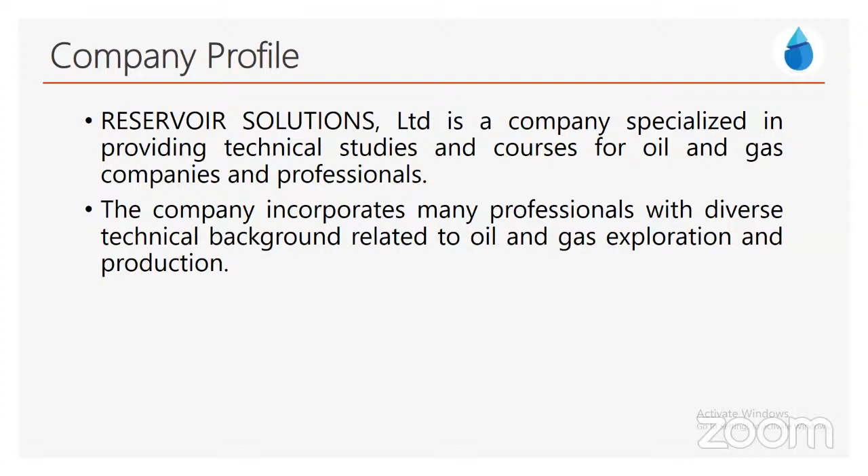Reservoir Solutions is a company specialized in providing technical studies and courses for oil and gas companies and professionals. The company incorporates many professionals with diverse technical backgrounds related to oil and gas exploration and production. Our services include technical reservoir studies, field development planning, reservoir static and dynamic modeling, economic feasibility studies, and technical support for academic research like PhD and master's degrees.

If you are a PhD or master's student and need support from us, we can provide you with the technical support that you will need. Also, we assist in writing technical papers and publishing them. We also have technical petroleum courses provided by industry experts, and we provide mentorship programs.

For mentorship programs, if you need to focus on some topic, like a private course related to reservoir modeling, nodal analysis, production engineering, hydraulic fracturing, or any topic related to oil and gas, we can provide you with a private course with an instructor with high experience related to this topic.

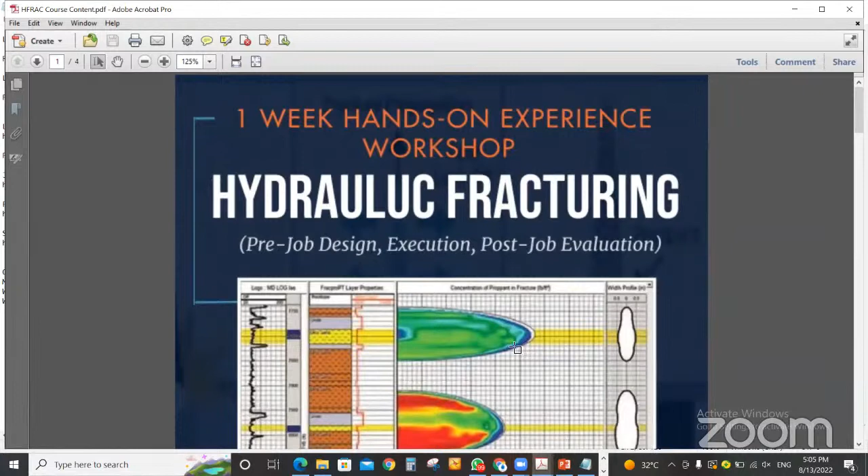Before introducing Engineer Muhammad, I wanted to give you an introduction to our upcoming courses. We have 2 upcoming courses. First, hydraulic fracturing: pre-job design, execution, and post-job evaluation. That course will start on the 25th of August, so we have about 12 days, then we will start, inshallah.

In all our courses, we provide lifetime access to recorded sessions, so if you have any difference in time zones, don't worry about that. You will have lifetime access to the recorded sessions. Also, application datasets - you will have datasets to apply using the software. Our workshop is 100% practical, application-based. We also provide course material like lectures, PDFs, Excel sheets, and so on. You will also have open discussion with the instructor during and after the course.

If you have any question related to the course after the course period, you can ask the instructor. At the end of the course, you will have a certificate with online identification. All of that package will be granted for all of our courses.

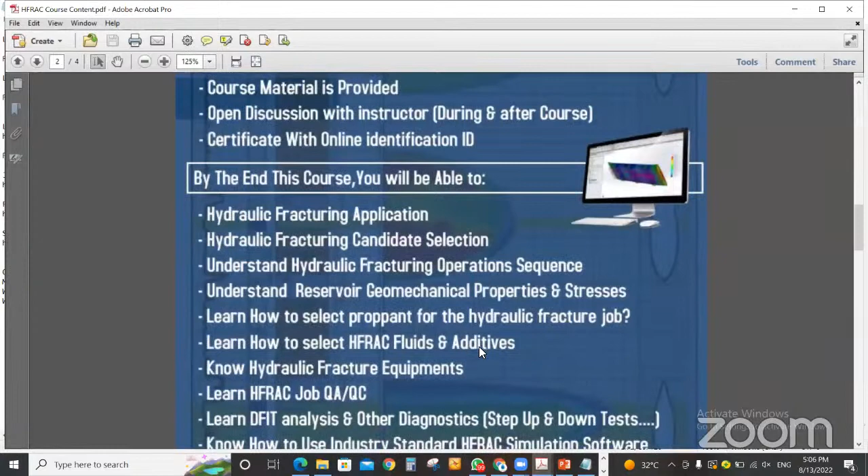For the hydraulic fracturing course, by the end you will be able to know the application for hydraulic fracturing, select the candidate for hydraulic fracturing, understand the hydraulic fracturing operation sequence, the equipment needed, and how to select the fluids, proppants, and equipment. Also, how to make a geomechanical model related to your reservoir.

Also, you can design the diagnostic plots needed for hydraulic fracturing, like the mini frac design or mini frac analysis, and all the other pumping diagnosis plots. Also, you can make QA/QC for the hydraulic fracturing job and all the other diagnostics for the evaluation of the hydraulic fracturing. All of that will be done on software to practical industry standards.

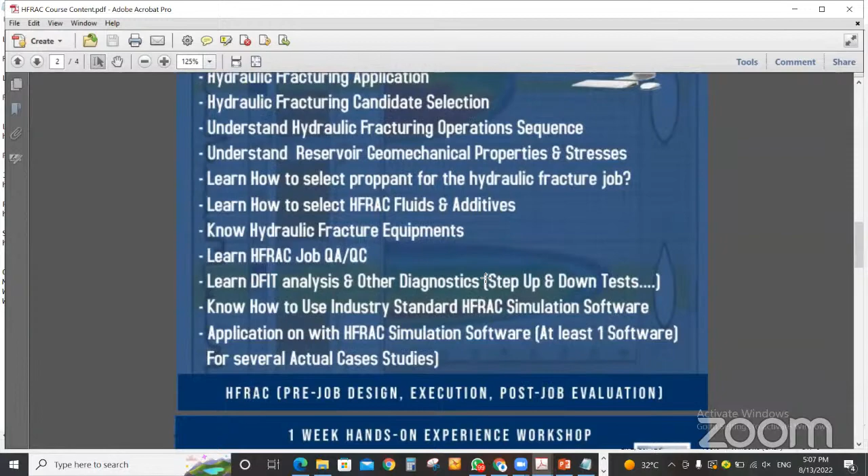The price of this course will be about $35 for students, so it will be a very good opportunity for students and also for professionals - the professional price is only $50. If you want to register for that course, I will send a link for registration into the Zoom chat. That was for the first course starting on the 25th of August.

The second interesting course we will start, inshallah, in September, on the 10th of September, is a 2 week hands-on experience workshop related to borehole image, FMI or OBMI, borehole image processing and interpretation. If you want to make interpretation and processing for the FMI log or OBMI log, you will have that chance after attending that course.

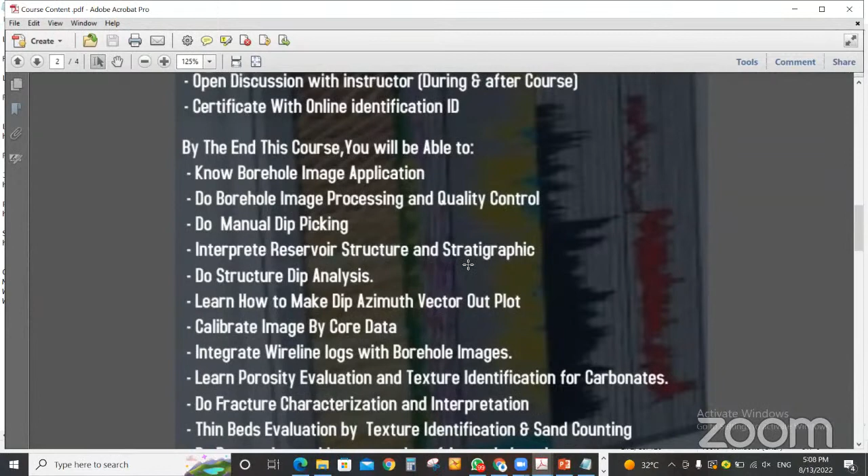The same package applies for this course: lifetime access, datasets, practical workshop, course material, and certificate with the instructor. By the end of that course, you will be able to know the application for the FMI, do processing and quality control, do manual dip picking, and interpret reservoir structure and stratigraphy needed for structure modeling of the reservoir.

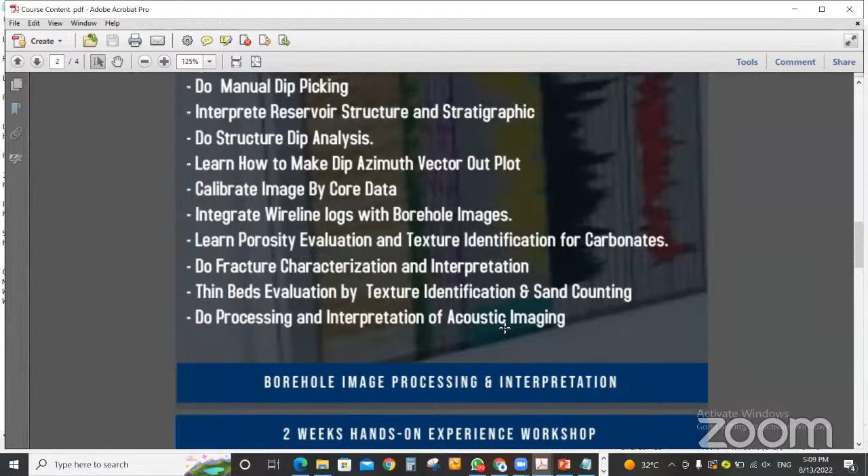Also, porosity evaluation, texture identification for carbonate reservoirs, fracture characterization and interpretation, thin bed evaluation by texture identification and sand counting, and processing and interpretation for acoustic imaging. We will also have acoustic imaging in our course. So all of that you will enjoy for the price of that course.

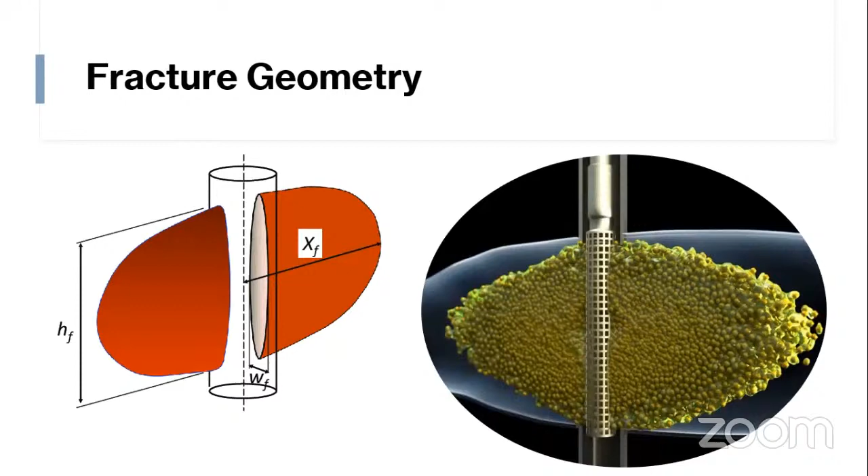The XF, the hydraulic fracture half-length, and fracture conductivity, is what is created in the formation, and is the main contribution of frac during the post-frac production.

To understand fracture propagation simply, we can make an analog for simplification. Let's imagine you blow a balloon with your mouth, and that's typically what happens during fracture propagation. We pump fluid - like in this case air, but in hydraulic fracturing it's fluid. So you pump with pressure, and this rate increases the volume of the balloon to make the fracture.

So the fracture geometry, which is the volume of the balloon, is a difference between the inner pressure and the outer pressure of the balloon, and this is the analog to the fracture geometry. Also, during treatment, we need to keep the net pressure high enough to create a suitable geometry and keep the width of the frac open for proppant placement.

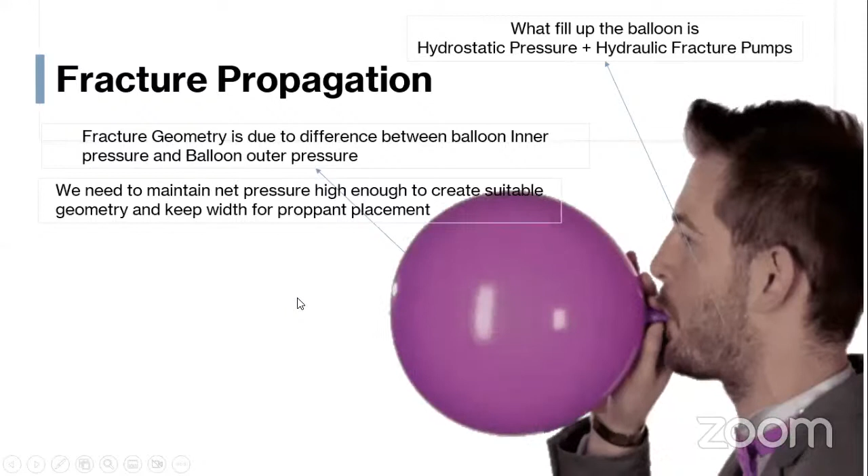Also, you will get some resistance if the distance is larger, due to friction, and this friction will decrease your net pressure. At the end, the shape of the fracture geometry depends on the net pressure - the amount of pressure you pump into the balloon, or pump into the formation - more than the closure pressure, or the minimum horizontal stress in the formation that you act against during placement. Also it depends on the formation properties, the leak-off rate, and many factors.

Also, an important point is what happens in this balloon analogy to the balloon material. You can imagine and figure out that the balloon material is under tension. Hydraulic fracturing is the same. During the treatment, during pumping of hydraulic fracturing, what happens to the well bore diameter is tension.

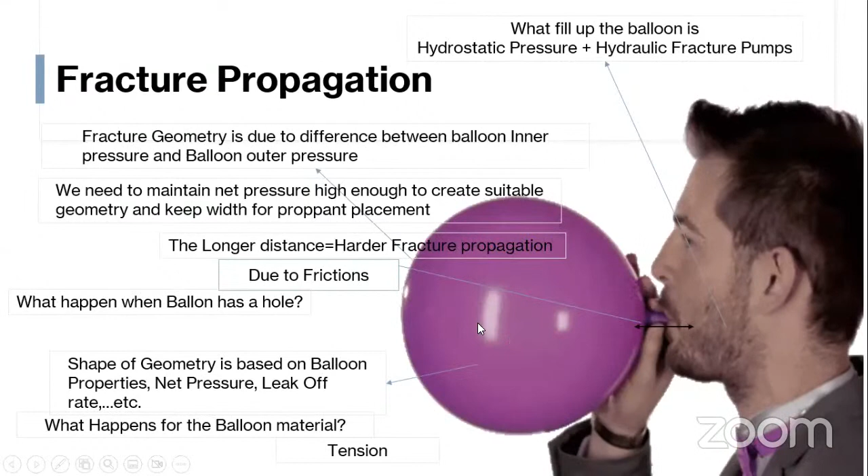Also, if the balloon has a hole, it will be harder to fill the balloon. It's the same during the treatment of hydraulic fracturing. If you pump hydraulic fracturing and there is a leak or loss in net pressure, it will be hard to create the required hydraulic fracture geometry.

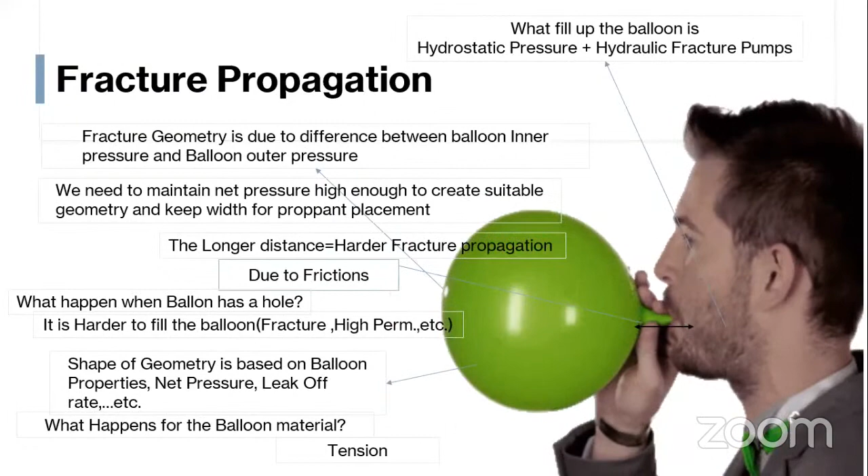So the main concept we need to understand to evaluate hydraulic fracturing during the treatment is net pressure. What is net pressure? Simply, it is the amount of pressure that increases more than the minimum horizontal stress in order to create the hydraulic fracture.

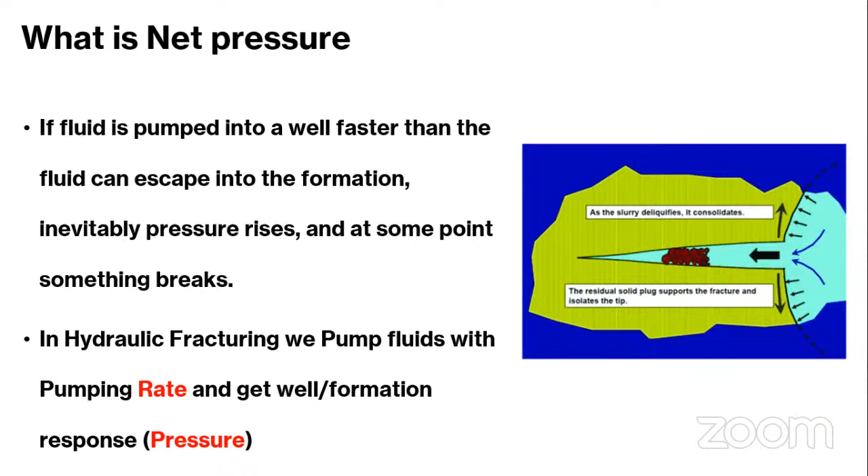To understand that, we need to imagine the concept of hydraulic fracturing is to pump with rate. We don't pump pressure, we don't put pressure, we pump rate, like pumping in a pipe. Then, due to the resistance of the formation, due to its low permeability, or because it can't handle this high rate, the pressure increases, and when this pressure increases more than the fracture pressure, it breaks. So the fracture is created due to the rate, not the pressure. Because we apply the rate and the resistance increases, the pressure increases more than fracture pressure, and it creates a hydraulic fracture.

So net pressure is simply the pressure inside the fracture if we remove the effect of what makes the formation close this fracture. Because we open this fracture, and the formation tends to close it to reach equilibrium. The difference between the pressure inside the frac and the closure pressure, or the minimum principal stress that tends to close the frac, is called net pressure.

To calculate this net pressure, simply we pump the fluid and measure the wellhead pressure. If we add the hydrostatic head on the wellhead pressure, and remove the effect of frictions, all frictions down to the formation, including perforation friction, pipe friction, near wellbore friction, or entry friction, we can get the pressure inside the hydraulic fracture. So the pressure inside the hydraulic fracture equals wellhead pressure plus hydrostatic pressure minus all frictions that we needed to overcome to open the hydraulic fracture.

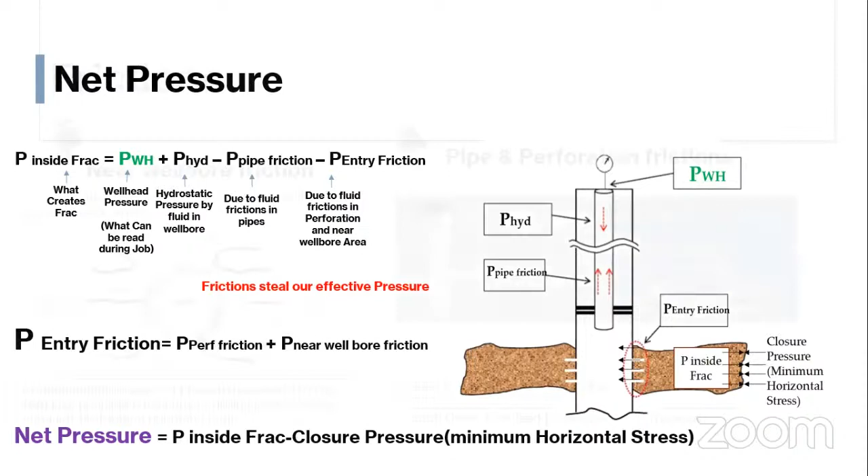The main loss in net pressure, the main cause that decreases net pressure, is friction. So if the friction increases, that takes away from my net pressure, and the fracture will close.

To understand net pressure well, you need to understand that we have two types of friction. Pipe friction is due to friction in the pipe, and perforation friction is due to having multiple perforations, which causes fluid friction. So the pressure that we open the frac with decreases by this amount, so we need to apply pressure higher than this value.

And near wellbore friction is due to the fracturing fluid orienting to be perpendicular to the minimum horizontal stress to allow fracture propagation. This orientation and alignment of the fluid path causes friction, called near wellbore friction.

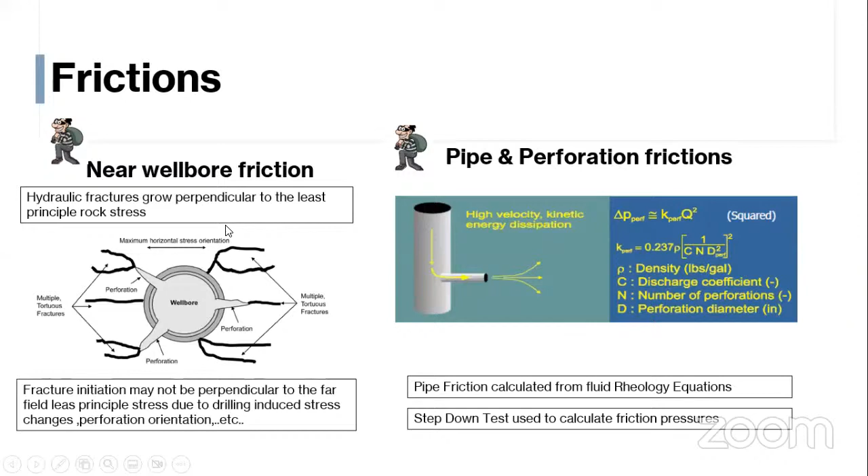Also, for hydraulic fracturing to create a fracture geometry, we need to understand that net pressure's relation with the stress difference is the main control of fracture height. So if I pump with net pressure of 1000 psi, for example, how will the fracture propagate in height? There's an old rule of thumb based on experimental study: any net pressure can break the stress difference between two formations if it reaches 50% of the stress difference, and once it reaches 70% of this stress difference, it will propagate and break the barrier.

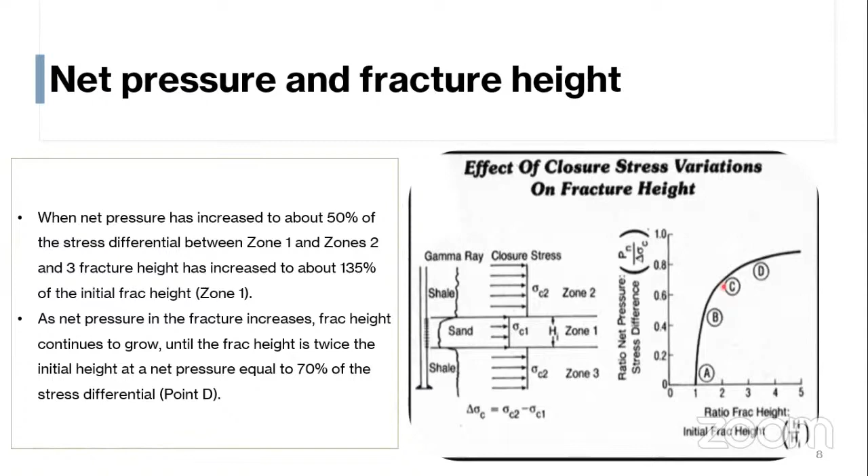It's very important to understand that we create net pressure, and this net pressure will struggle and compete with the stress difference. If this stress difference between two formations is very low, it can't control this net pressure, and this net pressure will cause the fracture geometry to propagate in the formation. So if I pump in this sandstone and the net pressure is more than 50% of the stress difference between the shale and sand, it will cause fracture propagation into the shale, until the net pressure is consumed by the fracture geometry.

So why do we need to understand net pressure? Simply because net pressure is related to fracture geometry, fracture height, fracture width - all the fracture geometry is created by net pressure. So we need to understand net pressure analysis to understand the real fracture geometry during design, during on-site analysis, or post-frac analysis.

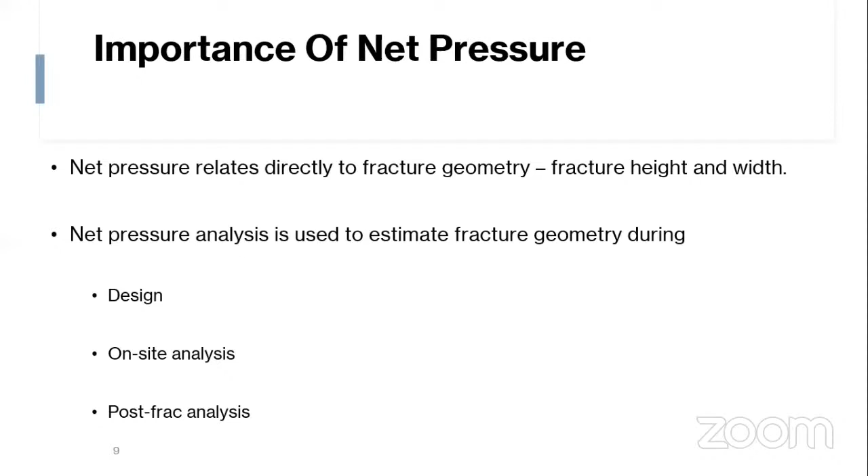Net pressure, as we said, is the main concept of fracture geometry and fracture propagation. If there is any net pressure created in the formation, there is a fracture with fracture width, and the width is related linearly with the net pressure.

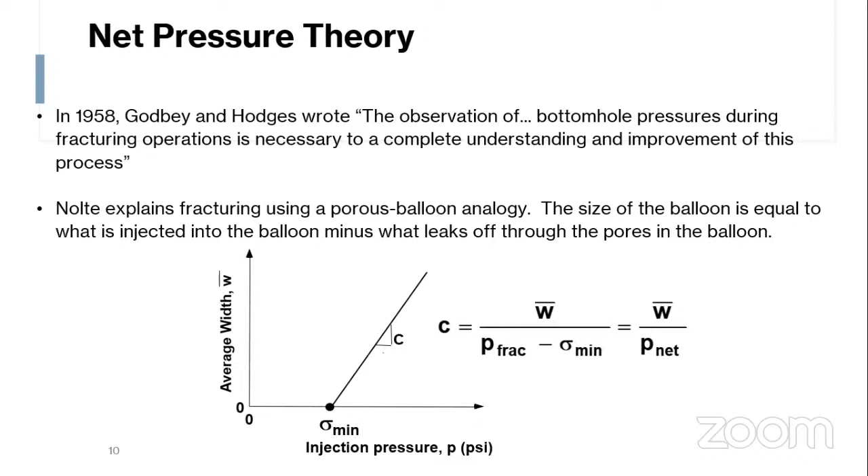So if I had a hydraulic fracture job, there is pressure going up and down during the treatment, and I have a plot of this. To understand what happened during the treatment, we need to convert this pressure to net pressure.

How to convert this wellhead pressure to net pressure? Simply by the equation: take the wellhead pressure, add hydrostatic pressure, and remove the effect of frictions - near wellbore friction, perforation frictions. All these effects are removed from the pressure, and after adding hydrostatic pressure, you remove the closure pressure to understand how the net pressure is created during the pumping.

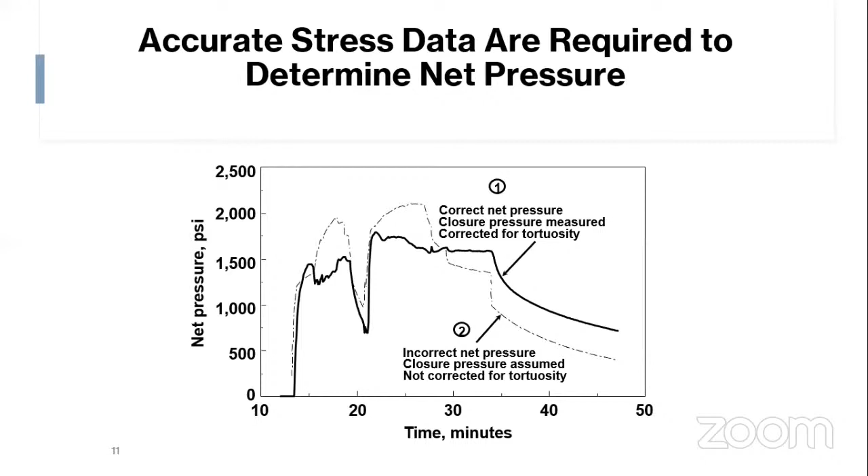And from the net pressure over time, you can understand how the fracture propagates.

Also, to understand fracture propagation, the fracture initiation starts from the weakest point, the minimum horizontal stress. There is minimum horizontal stress in the formation due to differences in formation properties. The main point is that fracture initiation happens at the point where the minimum horizontal stress is lowest, then it starts to propagate.

It starts to propagate and increase in height. So the net pressure at this time starts to decrease because we haven't covered the whole pay zone yet.

Then when we reach the barrier, the shale above, or the stress difference that can control this net pressure, fracture propagation starts to propagate in length, so we get an increase in net pressure. Now the stress difference controls the net pressure, so net pressure tries to create the fracture geometry in length.

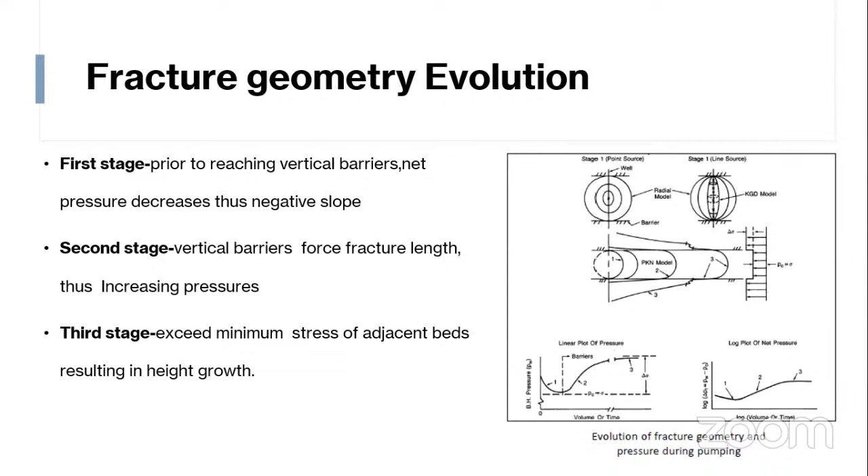Once the net pressure increases more than the stress difference between the pay zone and the barrier, the net pressure invades the barrier and creates a fracture in the barrier as well, which can be seen as height growth.

So there's a technique called Nolte-Smith technique - simply a magnification of the effect of net pressure over time. Nolte-Smith sets a technique with some assumptions, and it only works with net pressure.

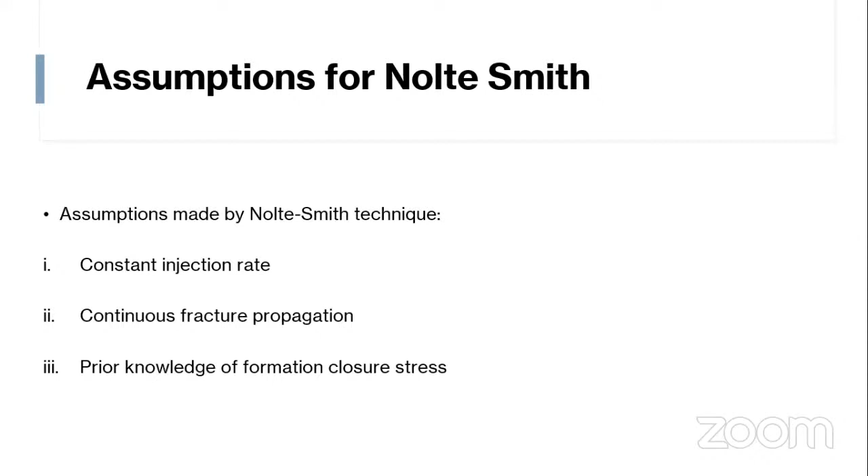It assumes constant injection rate and continuous fracture propagation - so the fracture propagates and doesn't stop during the treatment - and it needs the formation closure stress. Formation closure stress is a stress that tends to close the fracture against the fracture propagation.

Nolte-Smith is a real-time analysis. During the pumping, you can understand how the fracture propagates.

The Nolte-Smith technique lets you detect fracture events, like if you have a screen-out or proppant bridging in the formation, where the proppant doesn't go deep enough, or if you have height propagation where your net pressure decreases and your fracture geometry isn't efficient - created in height rather than in length as you designed. So it detects how the fracture geometry is created during the treatment.

But the main disadvantage of the Nolte-Smith technique is that it needs the formation closure stress, and since it's hard to understand the fracture geometry, it requires more experienced people to understand what's happening in the formation.

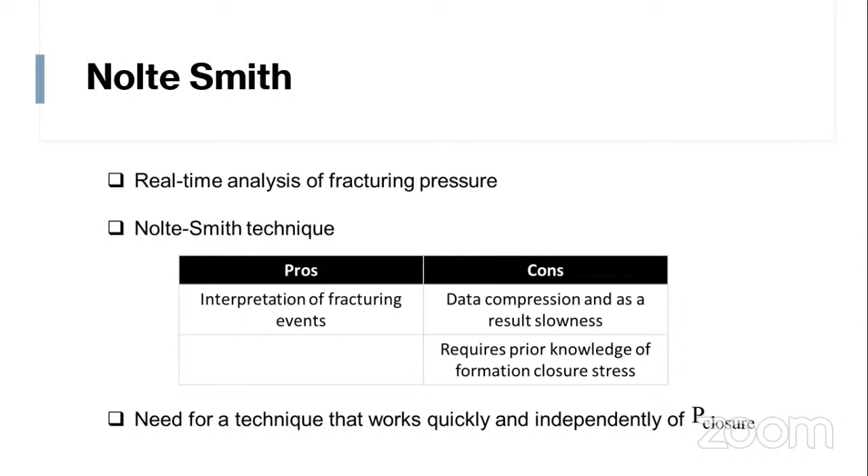The Nolte-Smith technique is simply a relationship log between net pressure and injection time, assuming injection rate is constant, we know the fracture closure pressure, and we assume the fracture propagation is continuous during the treatment.

First, at the start of pumping, at the start of creating fracture propagation, you can find the slope of log net pressure with time to be between 1/8 to 1/4. This slope means we create a fracture, but we still haven't reached the stress difference between the pay zone and the barrier.

Once it starts to stabilize, we now start to get propagation in height at normal fracture propagation. The slope is 0, and we need to keep monitoring this slope during the treatment in the frac van.

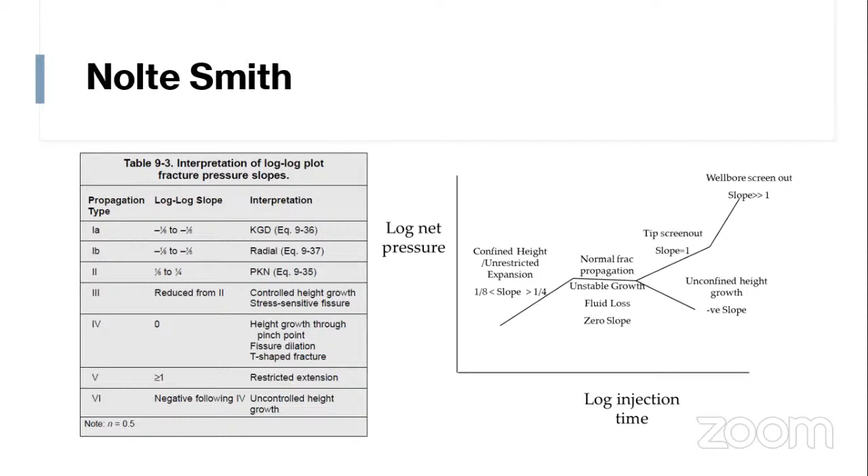During treatment, when you are in the frac van watching the net pressure go up and down, you estimate the fracture geometry from what happened. For example, if you see net pressure drop, your fracture geometry has more height than the design, so the fracture length is expected to be lower.

During the Nolte-Smith analysis of fracturing pressure during treatment, you get a rough figure of the fracture propagation and geometry, but the real analysis of fracture geometry is conducted after the treatment, after the pump shutdown.

There are two ways to evaluate your treatment after the job: tools to measure the fracture geometry and understand fracture performance, and analysis techniques - things you do in the field using the data collected.

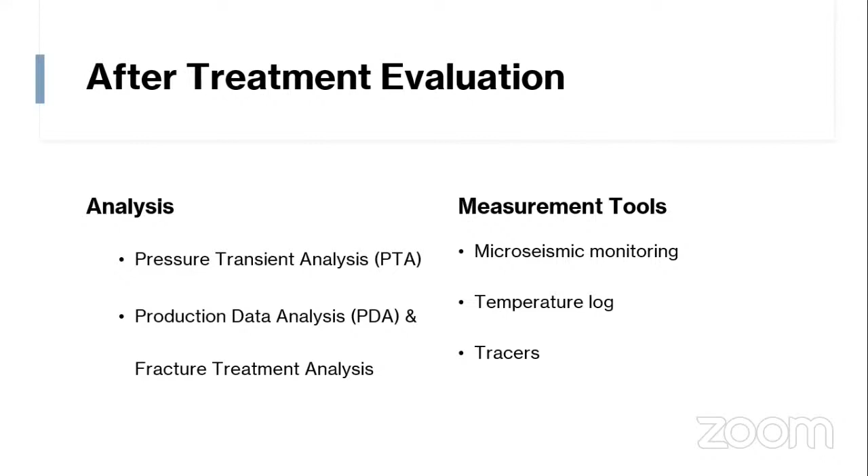After we conduct hydraulic fracturing and create a fracture around a well, the first period in post-frac production is linear flow, where flow comes only from the fracture itself. This can be identified similarly to wellbore storage, but it's only flow from the hydraulic fracture.

Once we get contribution from the reservoir, we have bilinear flow - linear flow from the formation combined with linear flow from the fracture, called the bilinear flow regime. Once the formation becomes engaged in production and becomes the main contributor, the fracture linear flow can be neglected, because the main contribution is now from formation linear flow.

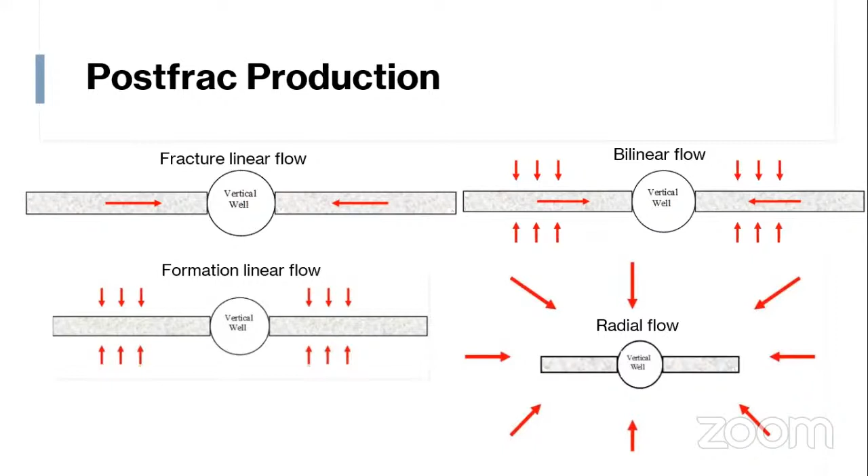This is the main understanding for post-frac production, which is the source for pressure transient analysis - we flow the well for a certain period at constant rate, then shut in to get the pressure transient analysis and build-up after the hydraulic fracture production period, measuring the shut-in pressure over shut-in time.

We get the analysis of pressure and rate for the pressure transient analysis of the flowing build-up period, and do our analysis using well test analysis - more details can be found in a well test analysis course. Simply, we plot delta P, the pressure difference between any point and the start of shut-in, and its derivative, as a log against delta T starting from shut-in time.

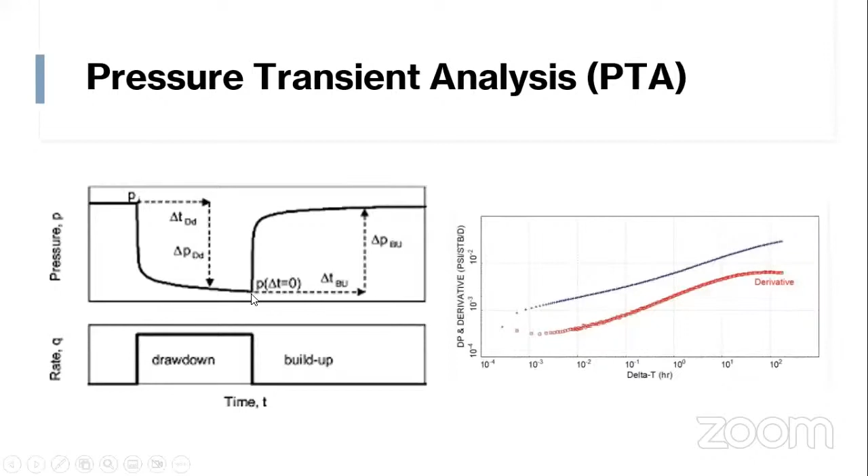From the pressure transient analysis, we can figure out from the slopes from the delta P and from the derivative, we can get the fracture geometry. For example, the bilinear flow.

This is our example for pressure transient analysis after hydraulic fracturing. For bilinear flow, we can identify it from slope 0.25, and from the bilinear flow we can get the dimensionless fracture conductivity. Dimensionless fracture conductivity is the permeability of the fracture multiplied by the width of the hydraulic fracture, over the permeability of the formation multiplied by XF, which is the fracture half length.

So if you get CFD, and you know the XF, and you know the permeability of the formation, and you know the width of the hydraulic fracture, you can identify the fracture permeability. Or if you don't have the width, you can identify the fracture conductivity.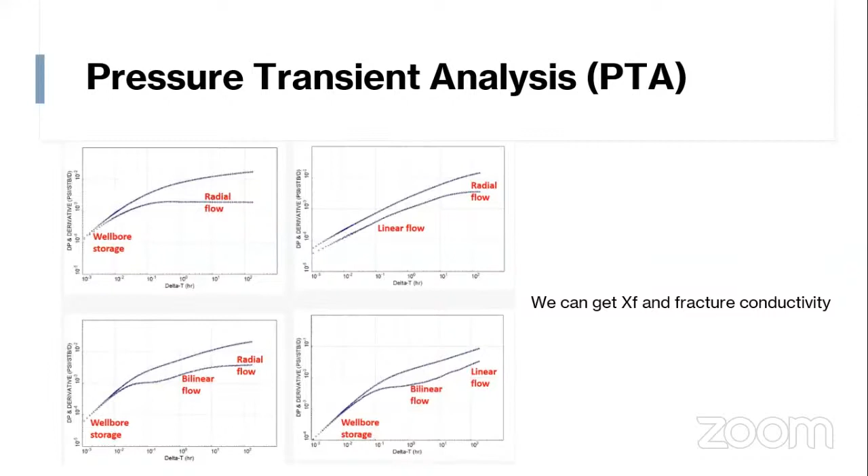From production data analysis, simply during the design process, we as frac designers estimate the fracture performance after hydraulic fracturing. So when I go to frac a well, I have a plan that after the frac it should, for example, produce 1,000 and drop and stabilize at 500 barrels per day.

When this design is conducted, I compare what I expected with what I actually got, by comparing the production curve, the flow rate with time, between the design and the actual one. But the main question is, what is the fracture geometry that produced this actual production?

So I need to tweak the fracturing model to produce the same production that I measured in the field.

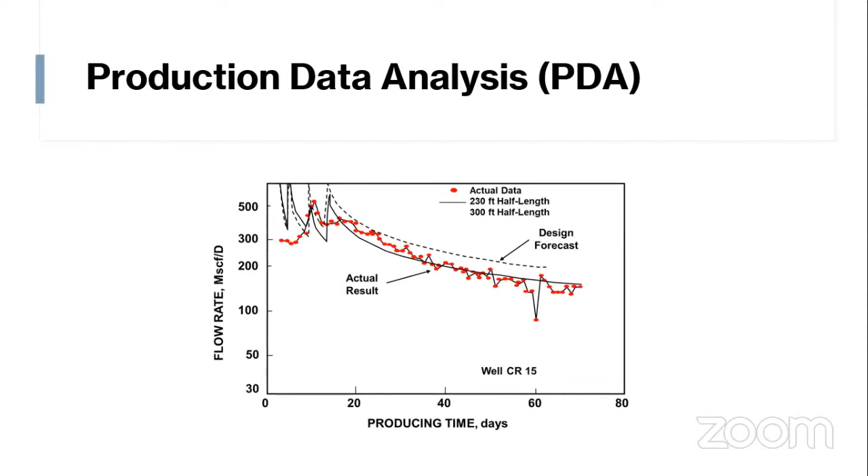So by fracture treatment analysis, we match the pressure during the treatment with the design pressure, just by changing the design parameters. Like, for example, if the field guys increased the rate, I need to increase the rate in the model. And if they got a different friction number than what I designed, I need to change the friction numbers in the model to match the pressure.

With the actual pressure, the fracture geometry from the fracture model and software is matched to the same geometry that's created in the formation. Then when we go to the reservoir simulation, the production should be the same if the formation properties are accurate.

So I match the pressure for the fracture simulator, then take the fracture geometry from the fracture simulator to the reservoir simulator, to get the production match. So if the production matches and the pressure matches, this fracture geometry is what was actually created, and this is what causes the production in post-fracture production.

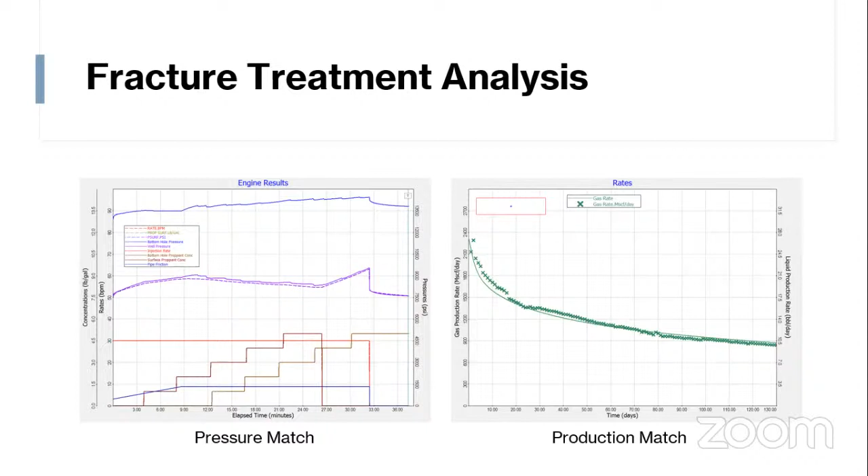Another way to get and understand the fracture geometry, mainly the fracture half length and the fracture conductivity.

Another way to measure the fracture height is by temperature log. Simply, if we measure the temperature profile in the formation with a static well bore and static fluid, we measure the temperature in the formation in the well bore. Then we start to circulate the well.

After we circulate the well, we measure the temperature, so we can understand if there is a channel or any anomaly in the formation.

Then pump hydraulic fracturing, and as soon as possible run a temperature log to measure the temperature in the wellbore, and we can get the fracture height.

We measure the height of the fracturing that the fracturing fluid covered using the temperature log, by measuring the temperature during the warm up, because formation with more fluid will warm back slower than the formation. If I have a formation without fluid, or less fluid, it will warm back quicker than the formation that has been invaded by the fracturing fluid.

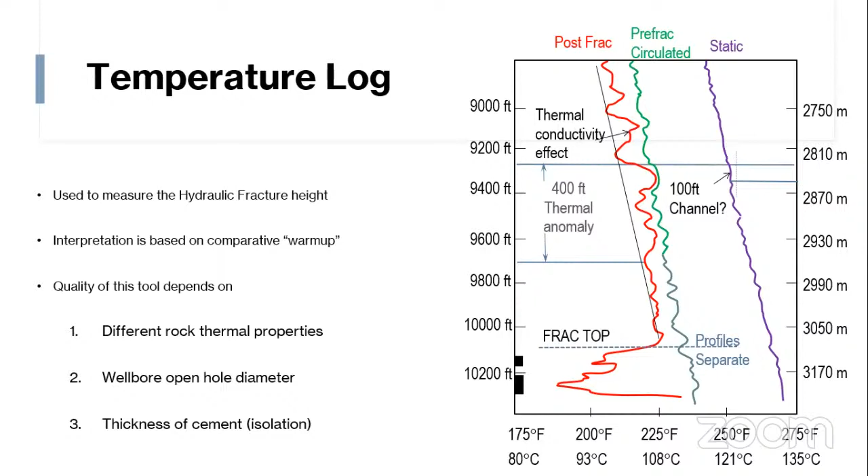But the quality of the temperature log depends on the thermal properties of the formation. There are anomalies that can cause misinterpretation, such as the wellbore hole, the open hole diameter, and the thickness of cement. There are some challenges with the temperature log, but it can be used to understand the height of the fracturing propagation that happened in the formation.

Another way to understand the length of hydraulic fracturing is by microseismic. We drill an observation well, set geophones in it, and during the treatment we measure the microseismic events.

Simply, microseismic is like hearing the fracture in the formation, to know where there's a fracture - the points that cracked. So the result of microseismic events is a cloud of cracks that happen in the formation, detected by geophones in the microseismic well.

It has a lot of limitations, like the distance between the monitoring well and the operation well, and the depth of the observation well versus the treatment well. There are some limitations, and there is development in technology with time. But the main idea is that you hear the cracks that happen in the formation, and compare, and once you get the cloud, you can figure out that this area or length is covered by the hydraulic fracturing.

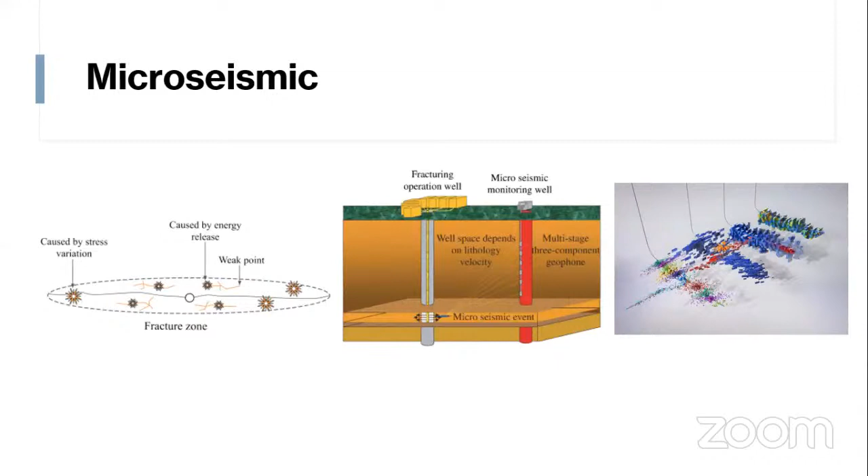Pressure transient analysis doesn't count for this length, which has no contribution in production. So microseismic can give you overall the maximum half length created in the formation, but pressure transient analysis gets the effective propped half length created in the formation.

Another way to understand the contribution of each frac stage in a multi-stage frac is to pump a radioactive tracer or chemical tracer with hydraulic fracturing stages, then produce the well, produce all stages, and measure the contribution of each stage based on the contribution of each chemical in each stage in the production flow. So it can indicate the relative conductivity between frac stages, and the contribution and fracture geometry relatively between stages.

Another use for tracers is to pump the tracer with hydraulic fracturing and run a gamma ray log, but it's rarely used due to environmental issues and safety issues for the frac crew and logging tool crew. From the gamma ray log compared to the pre-frac gamma ray log, we can understand the height of hydraulic fracturing, but it's not really used by the industry now.

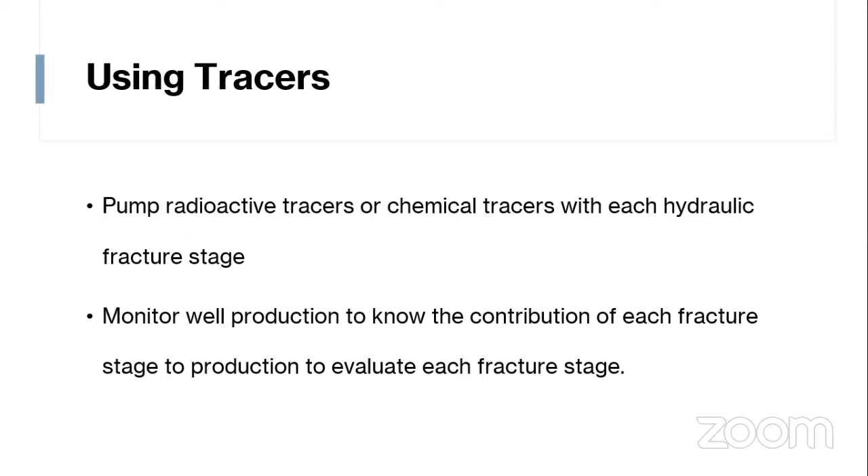Okay, so the first question is asking, what is the best geometry for fracture propagation?

To understand the best fracture geometry for your reservoir, you need to understand your reservoir in a better way. So, for example, if you have a high permeability formation and you suffer from near wellbore damage, the best fracture geometry is a wide frac and a short frac.

So you need only to treat the area around the well bore. If your reservoir is tight and you need to enhance production from this tight reservoir, you need a large frac, but you don't care a lot about fracture conductivity, because any fracture conductivity will be more than the formation permeability. So any sand or proppant type will be enough.